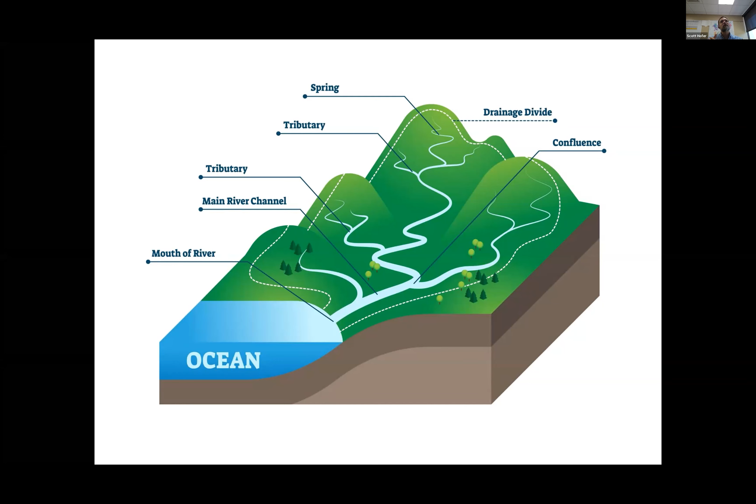And that's important, actually, that you can have smaller watersheds being a part of a larger watershed. And then for this area, of course, down here by the ocean, all those small little watersheds joined together would make that larger watershed. And you can see, it's all about gravity, right? So when a drop of water drops on one side of a hill, it runs into that drainage area or watershed, versus when it drops onto the other side of the hill, it goes into the other watershed.

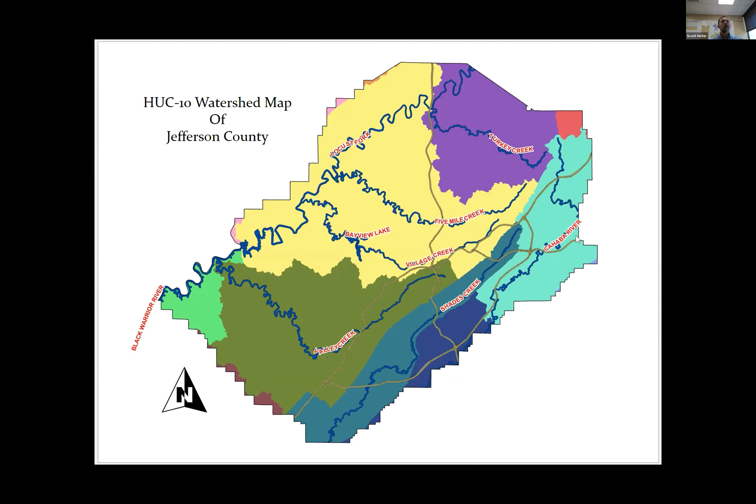And so hopefully looking at this picture of Jefferson County, you can see all the different major creeks that we deal with here in Jefferson County: Turkey Creek, 5 Mile, Village, and Valley. And then you have Shades Creek and the Cahaba River. So these are the different watersheds. They were kind of cut off; I just used Jefferson County to show you. And these, of course, continue on to the nearby counties. But this is a picture of some of the watersheds here in Jefferson County.

So now that I've defined 2 important definitions within stormwater, let's do a little talk about stormwater history. So I think we all know way back since Roman times, there were ditches on the side of roads, right? And that's where stormwater collected, of course, to keep it off the roads, either with their mud or whichever. And then slowly what ended up happening was people started dumping out what they call night soil, right, into those ditches.

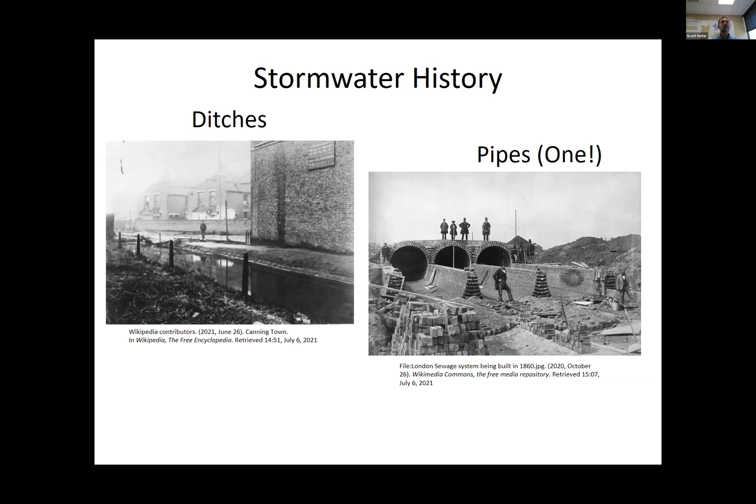Okay, thank you. So yeah, ditches were the first thing that we had that dealt with stormwater, as well as, as I mentioned about night soil, people pouring out their feces and such into those areas, and those would, of course, take it to the nearest creek. And most times they say ditches were around until the 1850s. Then around the 1850s cities, especially some of the larger ones, let's say London as well as Paris, realized, hey, there's a lot of stench. And there's a lot of really interesting history in regards to stormwater, if you consider that interesting.

So then they started joining them together, where they ran sewage as well as stormwater together. And here's a picture of the London sewage system around 1860. Some areas really caught onto this quicker than others. And so they say, for the most part, the single pipe or combined sewer was most popular from 1850 to about the 1930s. So then starting in the 1930s, and some cities started this even earlier, they started to separate it.

They realized the issue that you have about having all the sewage as well as stormwater all mixed together, and that could be an issue. It's a lot to clean. So they started to separate them.

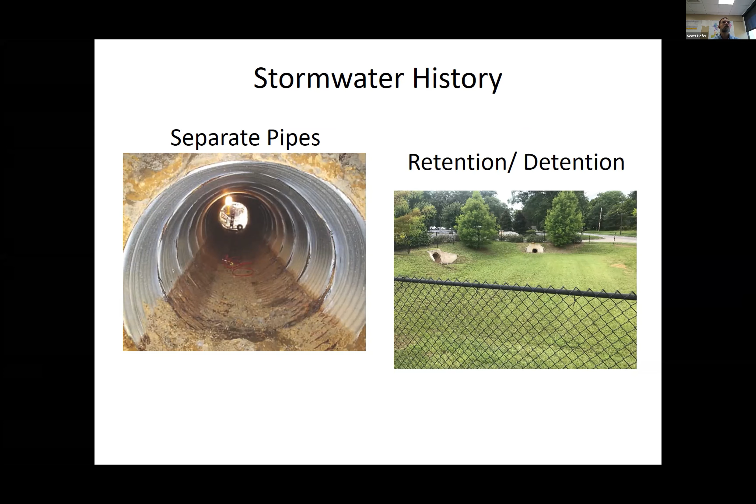Or additionally, I don't know if you can see, this is a larger pipe over here than this pipe. So the idea is almost like a bathtub where the water would go in, it would slowly seep out of the drain hole, and hopefully not just cause this huge rush of water coming off all that impervious surface. So that's kind of a quick and dirty history of stormwater as far as infrastructure.

So in 1972, with the Clean Water Act, two things happened. It started the Environmental Protection Agency, otherwise known as EPA. And they started giving individual industries a permit, and they called that point source. So if you had a factory on the side of a river, let's just say like the Cuyahoga, you were permitted to discharge, and you would have to test your water, and there were different restrictions. The idea was to hopefully decrease the amount of pollution going into our streams. Those permits are called NPDES permits, National Pollutant Discharge Elimination System.

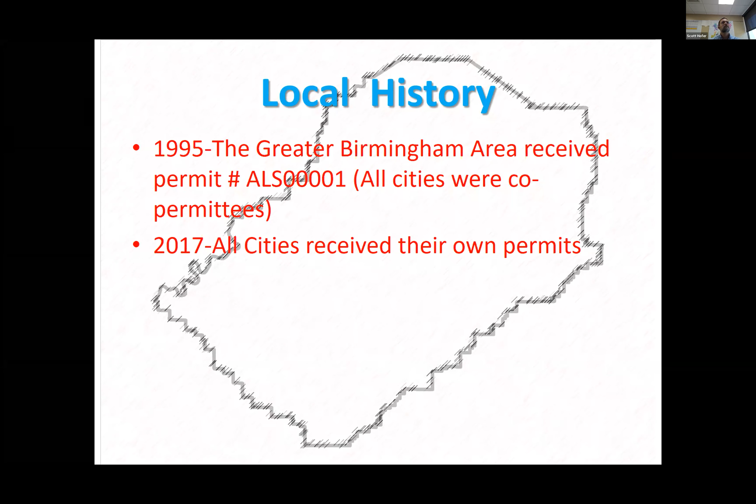So just a little local history here in Jefferson County. In 1995, the greater Birmingham area received a permit, and ALS, that's the permit number. In that permit, all the cities were named co-permittees. And that continued until 2017, when ADEM decided that they would give all the cities individual permits here in Jefferson County.

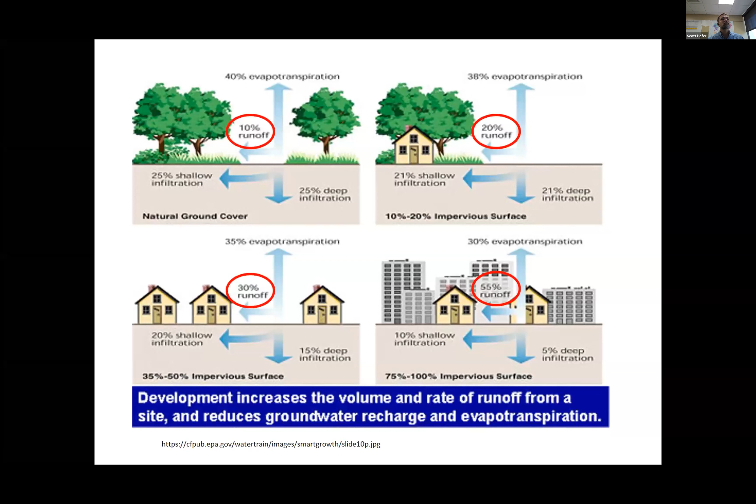So then let's say you start adding 1 house, 2 houses, and continue. You can see how the amount of runoff increases 20%, 30%, until you get to an area like a large city, downtown Birmingham, where you probably have 75 to 100% impervious surface. And that means that of all the water that's raining on there, you have 55% runoff and only 5% infiltration, or 15 together. So you had 10% runoff and 50% infiltration versus now having 55% runoff and 15% infiltration. So instead of going into the ground, you have a lot more water running off into the storm drain system.

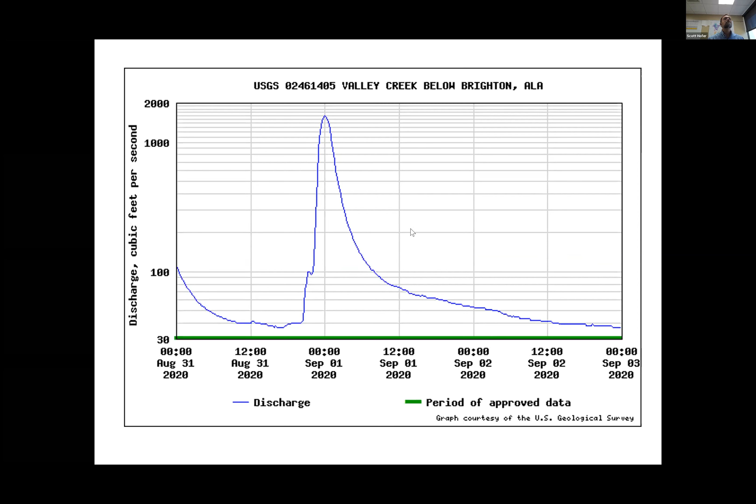And so here is a graph straight from one of the USGS sites we have. So here's Valley Creek below Brighton. If you're familiar, 59/20 going west down by Jaybird Road is where this site is. Valley Creek has a lot of urban area, and you can see what happened on a rain event, how quickly it spiked and came back down. That's what you would expect for an area that is urban with lots of impervious areas.

Hey, and so the second one, yes. Phyllis Clay just said that she can't hear the audio. Is anyone else having audio issues? Phyllis, okay. Everyone else can hear okay. Phyllis, can you make sure that the audio on your laptop is turned on and is up all the way? Oh, she said she can hear now. Sorry for interrupting you. Okay.

Pesticides, herbicides, fertilizers, they're fine, except you need to make sure that they're following the directions. The issue we see is when there's runoff, or let's say it was not applied correctly and it rained and ran into the stream, and that can cause problems with fish, especially with fertilizers. You can cause what's called an algal bloom, and an algal bloom causes the oxygen level within a creek to really drop out, which then can cause fish kills.

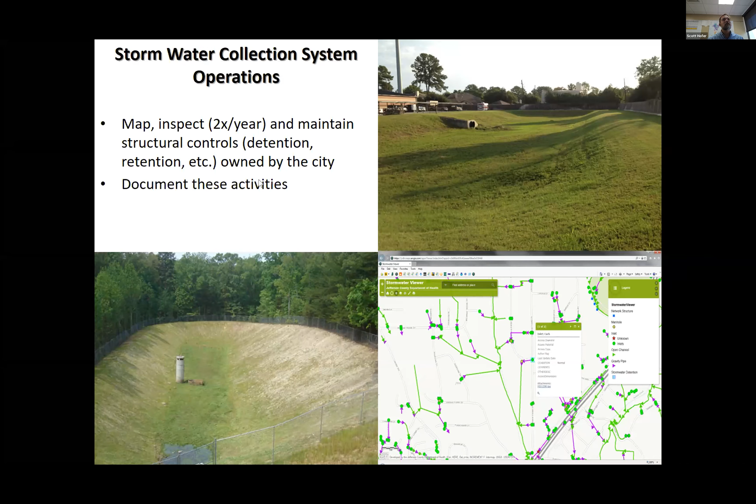So the first one is you need to inspect any detention or retention pond, otherwise known as a structural control, within a city. Those need to be inspected if it's on public property. So let's say any of the cities in Jefferson County, if they own a detention or retention pond, let's say at their city hall or on some public piece of property, they need to inspect it twice a year, and they need to document these activities.

Another large one is public education and public involvement. This is a really big part of our program, and Janika, who introduced me, is head of our educational program. So this is a big part of what we do. So we have to make sure we try to educate all different aspects and people within our community. So citizens, students, business owners, all need to be educated, hopefully, on what they can do to decrease any issues and decrease the amount of water pollution, right, going into our streams.

Some of the tools that we have for that are pamphlets, the internet, right, calendars, backpacks, t-shirts, carabiners. There's a lot of different things that all the different cities and programs can give away to hopefully pique someone's interest or get them to understand more about stormwater. And places that we have to educate, right? We go to city halls, schools, local activities, Zoom calls like today, right? And all these need to be documented again to show that the cities or those programs are making an effort to educate their citizens on what stormwater is and hopefully decrease the amount of pollution.

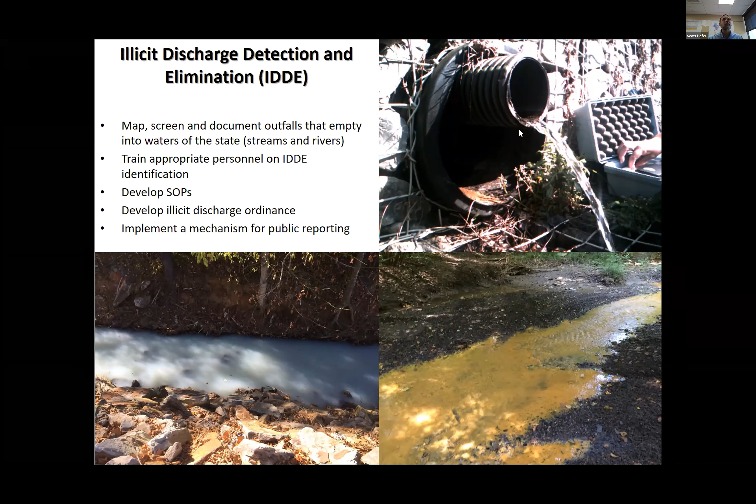So if there's an outfall that's running, like you can see in this picture right here, and it's been 72 hours since the last rain, there could be a good chance this could be an illicit discharge, or it could be an underground spring, but that's what we test for. And these are kind of pictures of issues we've seen in creeks caused by illicit discharges.

So a part of this too is to make sure that you have an ordinance about illicit discharges. Construction site stormwater runoff control. This is where the cities need to, I mentioned about the issues that you have when you have erosion and have that sediment getting into a storm drain system and what it can have on the wildlife. So a city is supposed to inspect them either on a monthly basis or every other month, depending on their watershed, if there's a certain impairment within their watershed.

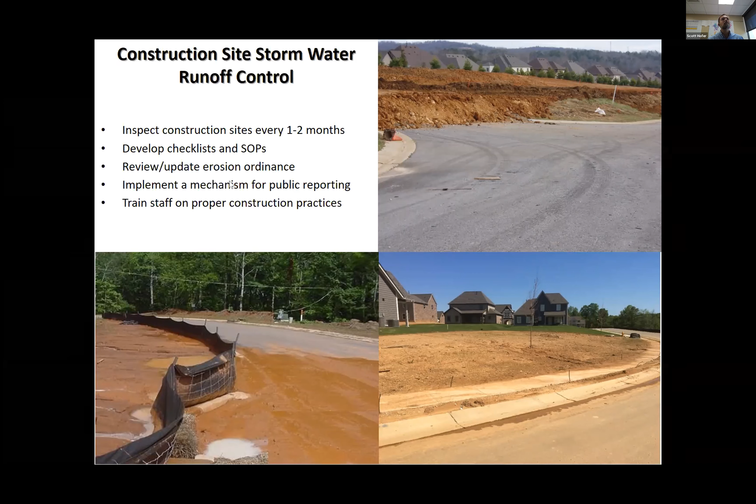They need to do a checklist and make sure that they go through all the different parts about, hey, this needs to be checked, a silt fence. This is a silt fence that stops dirt from running off sites. Making sure all those, what we call BMPs, best management practices, that's another word that we throw around within stormwater, that all the best management practices are in place to stop the dirt from leaving a site. You can see here, review, make sure again that they have an ordinance on that, implement a mechanism for public reporting. That's really important to making sure that people can report, and then training staff.

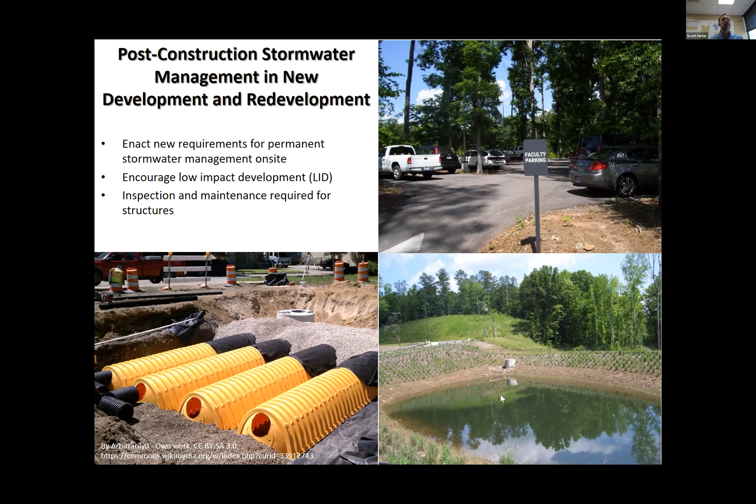This is underground detention, where the water is stored underground and then let out at a slower rate. And then this is a retention pond, but you can see where the water, for the most part, can infiltrate into the ground. But again, if the water gets really high, it can go into this and run out so that it doesn't flood an area. But low impact development is a big part of those larger sites that are an acre and above.

Spill prevention, this overall is just the idea of, you know, what's the city doing? Do they have trained staff to know, if there's a spill, how to react to it? And the next one is pollution prevention and good housekeeping. I consider this one, hey, is the city really being a good steward, or the permitted entity? Are they being a good steward? Are they doing everything they're supposed to, to hopefully stop stormwater issues?

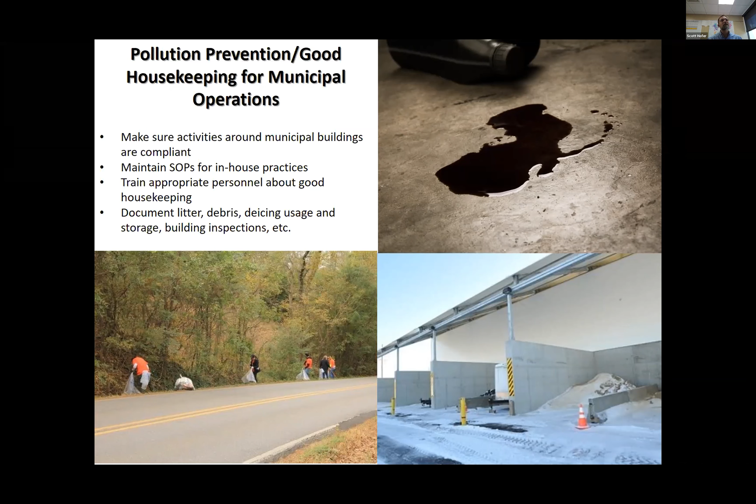So that can mean, number one, if they have a spill, are they making sure they clean it up? Are they storing, let's say, salt and such? I know we don't have too much salt used around here, but salt and sand, making sure that they have them stored correctly, right? A big part, a lot of cities pick up litter, and that's really great for our stormwater programs because the less litter that's on the side of the road, the less litter ends up in the creek, and that's really important.

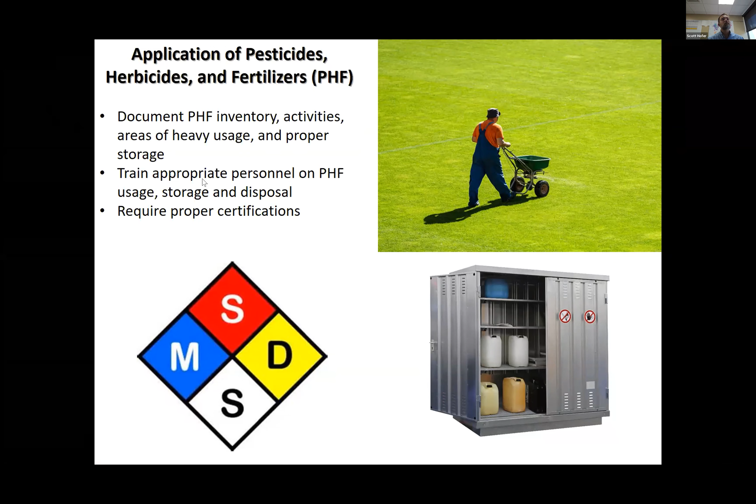The application of pesticides, herbicides, and fertilizers. I think a lot of the cities that I work with are getting away from pesticides, herbicides, and fertilizers. But the idea is, if they are using them, hey, do you document your inventory? Keep up with your inventory. Make sure it's stored safely. If someone's using a chemical that you have to be certified for, make sure they're certified and trained appropriately on how to use pesticides, herbicides, and fertilizers on different areas. And that's really what this is about. So train appropriate personnel and then require proper certifications. Oil, toxics, and household hazardous waste.

This is where, I mentioned about litter, but there's a lot of other things, of course, that you can't put in your trash, right? So people end up dumping it a lot of times somewhere. So we started on a yearly basis. A lot of the stormwater programs here in Jefferson County have come together to pay for a household hazardous waste day. And that's where we are trying to take back some of those things that somebody might try to pour out into a storm drain or on the side of the road, which could end up getting into a creek.

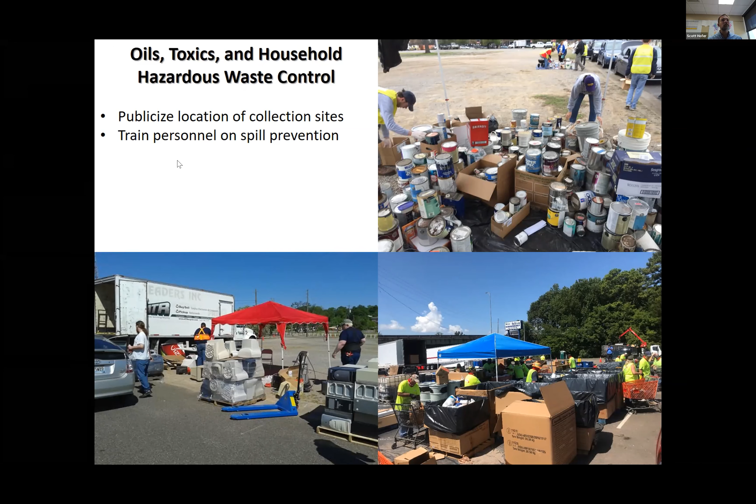A lot of things we see is paint. Paint's a big thing. Every year, actually, I get a call about a creek turning white, and it's because someone has washed out some brushes or a little paint can into a creek. That happens. So picking that up. Another thing, of course, is now with TVs, we get a lot of large screen TVs that aren't easy to get rid of. People dump them on the side of the road. You don't think of that as a chemical, but again, it getting into a creek or causing issues, we want to keep as much of those things out of our streams and creeks. So that's the HHW.

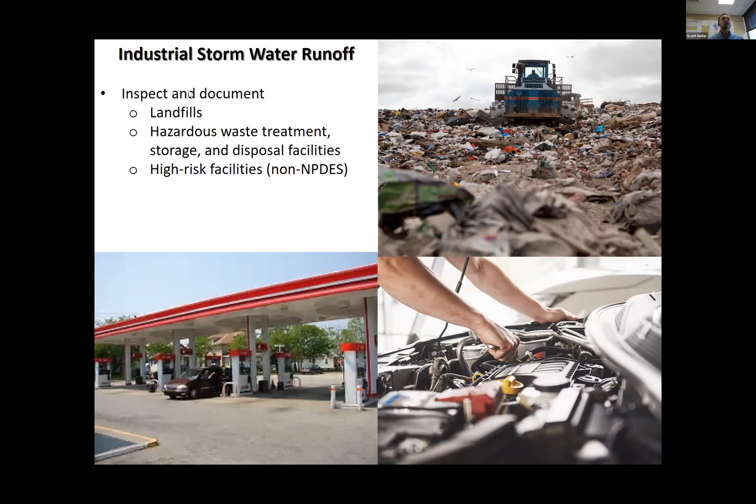And then industrial stormwater runoff. So this is the idea that within a city, you have mechanics and different small industries. I mentioned at the beginning, there are large industries that have NPDES permits, but there are smaller industries that don't quite qualify for an NPDES permit. And so we are looking at those sites and making sure that they are not causing an illicit discharge or anything along those lines. So, high risk inspections, as we call them.

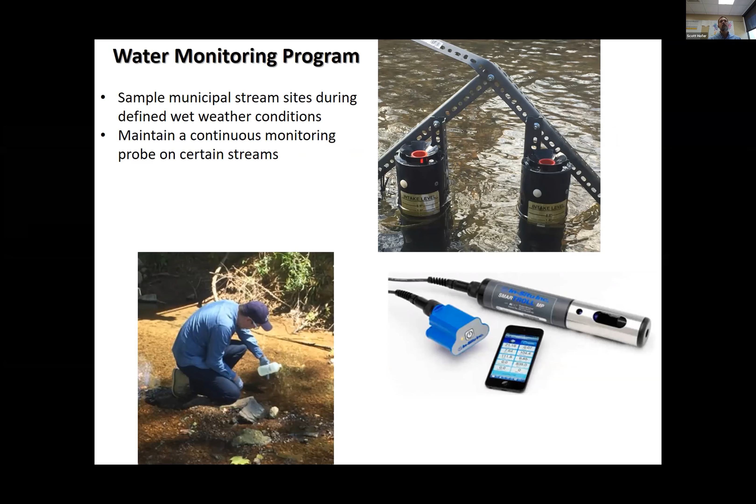And the last element of a stormwater program is water monitoring. All the different programs have some sort of element about water monitoring. A lot of them have a wet weather condition. So when it rains, hopefully within what they call the first flush, when that water really starts to go up, they capture that water to see what's running off the streets. And some cities additionally do dry weather sampling, to see if there is some sort of chronic issue in a creek when there is no runoff. As well, there are continuous monitoring probes; here in Jefferson County there's multiple USGS stations that give instantaneous water quality parameter readings.

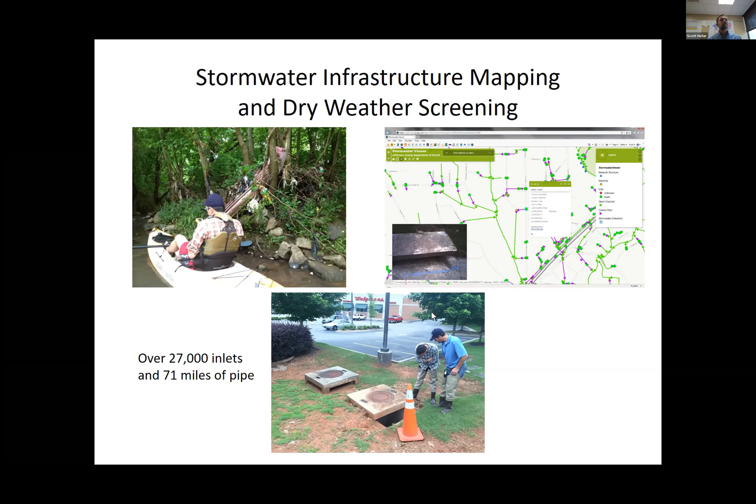As well as here's a picture of us doing dry weather screening. I mentioned looking for outfalls, going and testing them. We walk creeks, we canoe creeks, we do whatever we got to do to look for those outfalls. And we do all these for our member cities.

We developed a template for the SWMPP, which is the Stormwater Management Program Plan. The idea behind that is the city's supposed to write that every year, and it's supposed to say, hey, this is what we're going to do in the upcoming year. So it's a really important document. So we helped them customize that, make sure that it's meeting their city's needs, and that they're meeting their permit requirements. And then we designed a watershed approach monitoring plan.

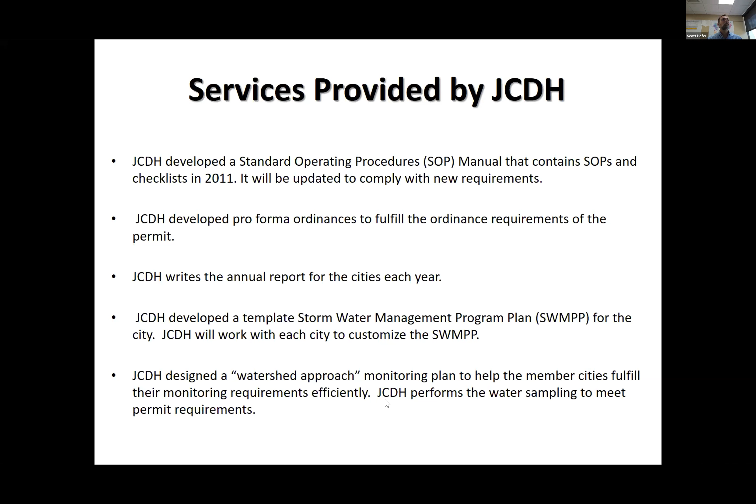So we monitor different areas throughout all the member cities to make sure that the water quality is good. JCDH also paid for continuous monitoring USGS sites throughout the SWMA cities, as well as we partner with some of the other cities in regards to these instantaneous water quality parameter sites. So I think that's a really neat thing. You can see what's happening in a creek instantaneously, or about every 15 minutes is when it reads.

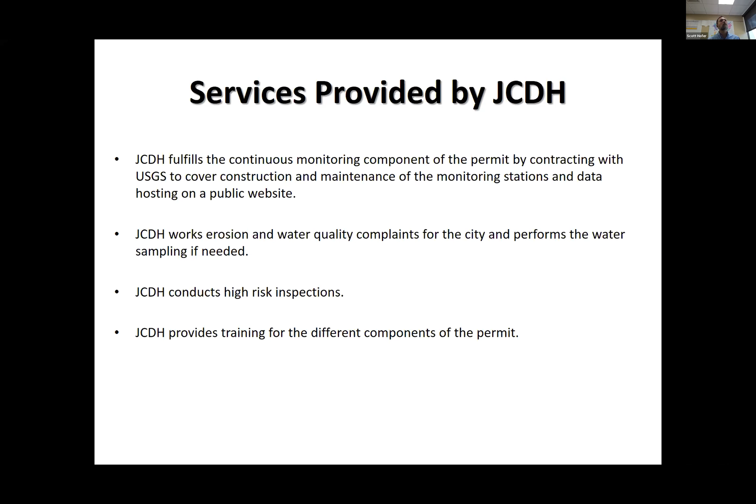And then JCDH works erosion and water quality complaints for a city. If a city asks us to come out, we'll come out and work it and do any sampling if need be to make sure we can understand what that illicit discharge is. I mentioned we do the high risk inspections for the cities to make sure they meet that requirement. And then we provide any training for the cities that's mentioned in the permit. Either we come out and train them individually, or we have videos that they can watch about different components to make sure they meet all their requirements.

So, all right, I think it's 12:17, hopefully. So are there any questions? Yes, there are a few questions inside the chat. I'm gonna scroll back up on my chat. Okay. I'm going to open mine so I can see them hopefully too. Okay. Well, I can't.

So Jessica said it feels overwhelming. How can we help beyond making good individual choices? I think getting involved in your city, maybe. You're right, there's a lot to do. I think spreading the word. A big thing that I see when we go to different cities is a lot of the general public still don't understand that the water that runs off to the street doesn't go to a water treatment plant. Hopefully if people realize that this water is not going to a treatment plant, they'll think, oh, I need to make sure I don't dump anything.

So that's a big thing we're trying to get the word out on, just really understanding that stormwater is not treated. That's really the first step, and I hope that kind of helps push people to understand how to treat the environment. Okay. Also, all the creeks that you mentioned, except for I think Village Creek, have a society that people can join and support if they're interested in supporting those creeks. And there's also the Alabama Rivers Alliance if you're looking at the state's water as a whole. Their big push right now is getting a water plan, because Alabama is one of the few states that doesn't have a water plan when there's a drought or anything.